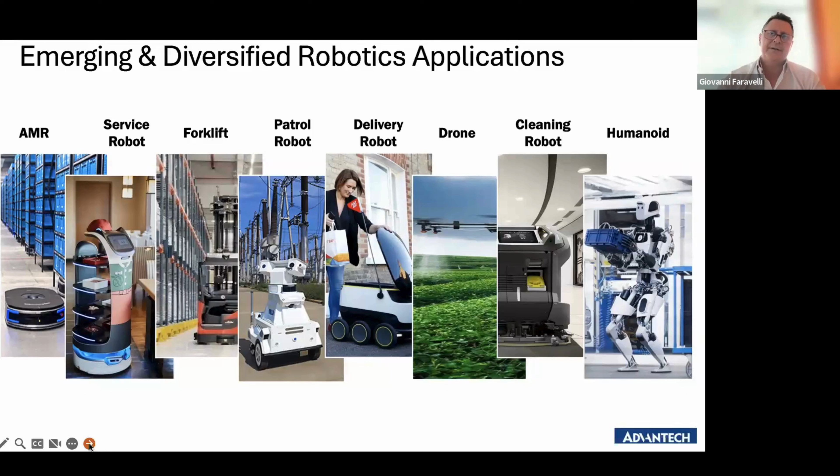I think we can all agree about future massive implementation of robotics in many different industries. In these pictures, you see something already happening, like carrier AMR or autonomous lifter in logistics and manufacturing, service robot in hotels or restaurants, patrol robots for public surveillance or monitoring in harsh environments, delivery robot for public personal services, drones in agriculture, and other applications, and definitely cleaning robots. We see already a strong demand here. And humanoid, also for many kinds of applications to replace humans in intensive and repetitive tasks.

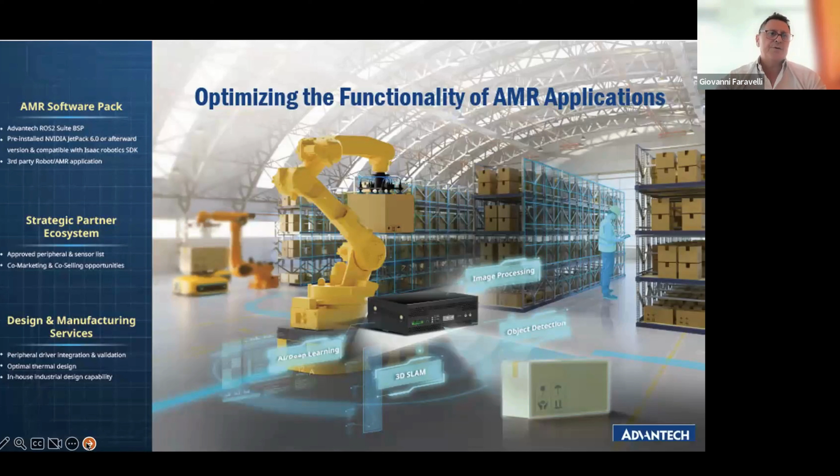In today's webinar, I restrict the focus mainly on one controller for robotics based on NVIDIA technologies, well appreciated by developers since it delivers easy hardware and software integration, rich IOs, and high AI inference performance. So the product name is AMR-S100, based on Jetson AGX Orin.

In general, data acquisition from sensors in order to enable perception and localization are vital for an autonomous mobile robot. For this reason, we have integrated rich IOs like USBs, Ethernet ports, and up to 8 GMSL2 camera support. So we ensure support for LiDARs, radar sensors, useful for mapping and safety reasons, but also serial port, digital input-output, and dual CAN bus for motion control.

Wireless connectivity is also key for mobile robots, where we can integrate Wi-Fi 6 and 7 and 4G, 5G connectivity using our own M.2 add-on modules. Really appreciated by our customers, the integrated IMU sensors, very important to deliver orientation information to ensure reliable and precise robot movement.

Reliability is, of course, a key aspect, and we design and carefully validate our computing solution against high-level shock and vibration, and also wide operating temperature and wide power inputs. This makes the AMR-S100 the ideal controller for robot manufacturers.

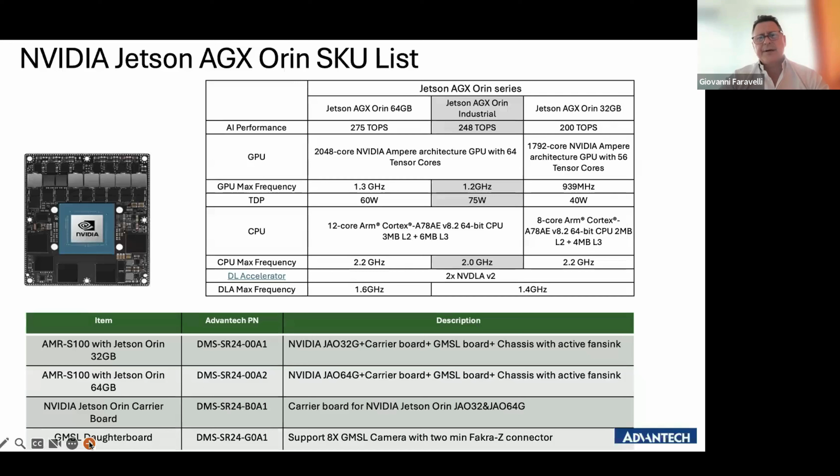AMR-S100 is built around a standard NVIDIA module, and we decided to create standard part numbers using non-industrial SKUs due to lower power consumption and also price positioning. That's important. You can see here the configuration available for standard part numbers and also part numbers for carrier boards and GMSL daughter boards. You will better understand in the next slide.

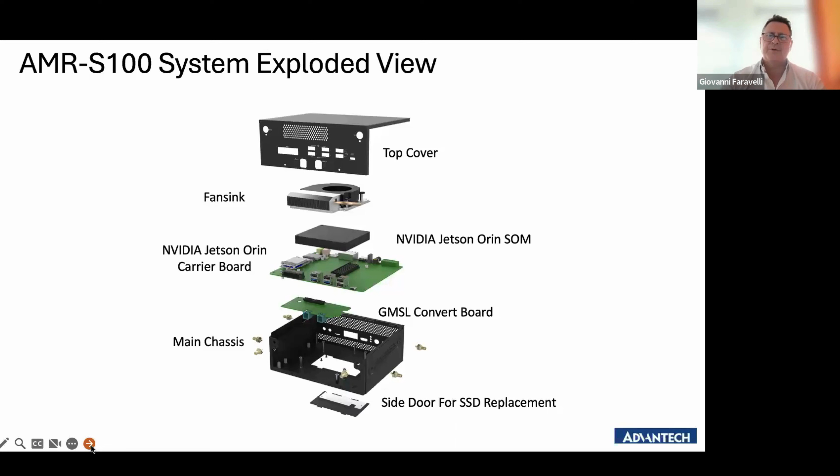We designed it so the AMR-S100 is not only an off-the-shelf solution, but also meets customization demand from customers. This is by project, of course. For this reason, the product is fan-based, and apart from the NVIDIA Orin AGX module, the carrier board, GMSL board, chassis, and antenna position are customizable.

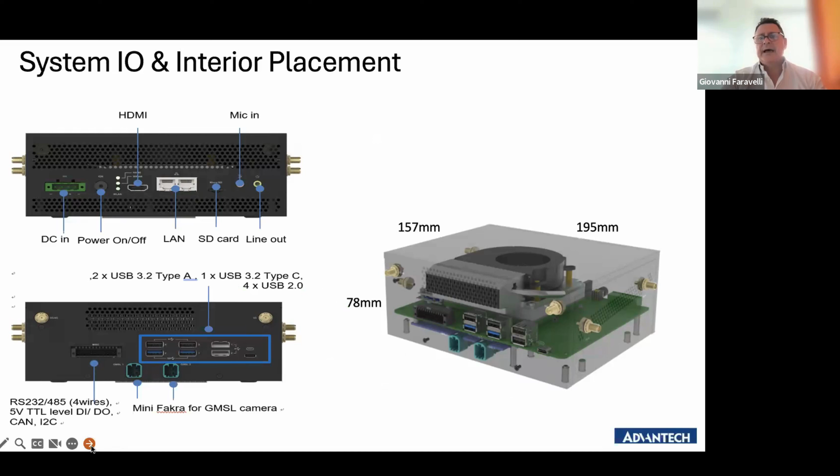In this slide, you can have a better view of the IOs, connector placement, dimension, and internal view of this compute unit.

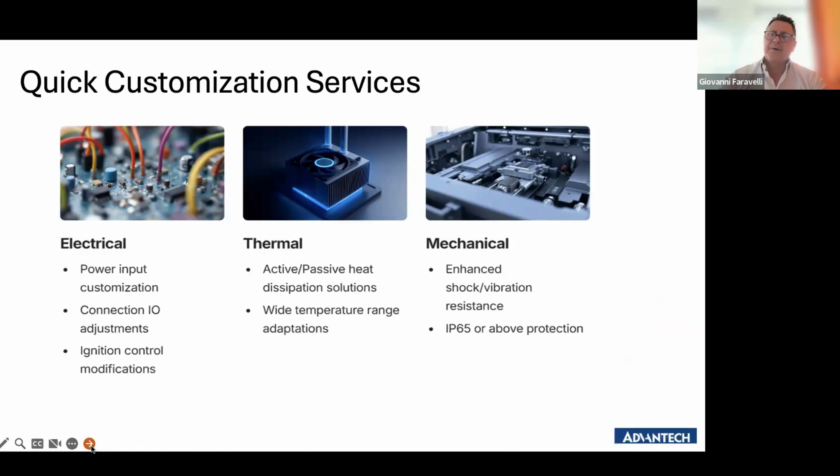As I said, by project, we can provide a number of customization services from an electrical point of view, like power input, connection IO adjustment, and ignition control modification. Thermal design: we can engineer a thermal solution in order to have passive cooling. Mechanical: we can support shock and vibration required by the customer and its specific application, and IP grade as well.

Reliability is a key principle in Advantech design. We take strong consideration of the kind of environment the AMR has to operate in. Our project managers have close cooperation with robot OEM engineers to ensure our compute unit meets environmental challenges.

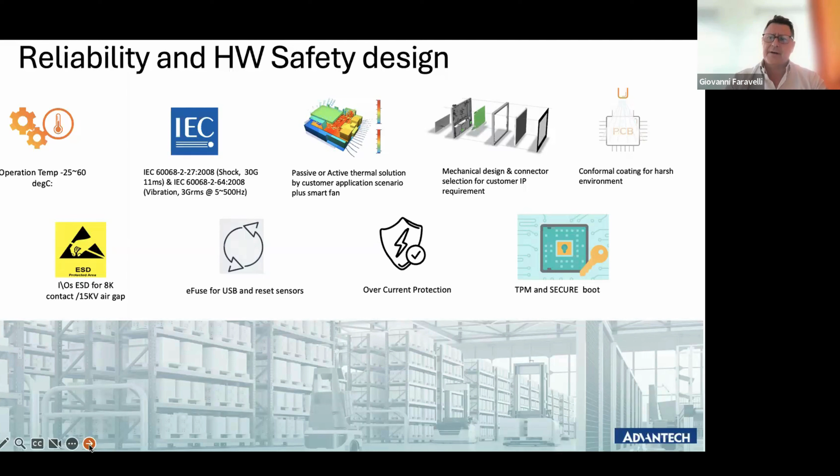As I said, about operating temperature, shock vibration, thermal dissipation, IP grade, and in case optional conformal coating, but also safety measures like IO ESD protection and eFuse USB protection, and the reset function in case USB sensors hang, overcurrent protection, integrated TPM, and also secure boot.

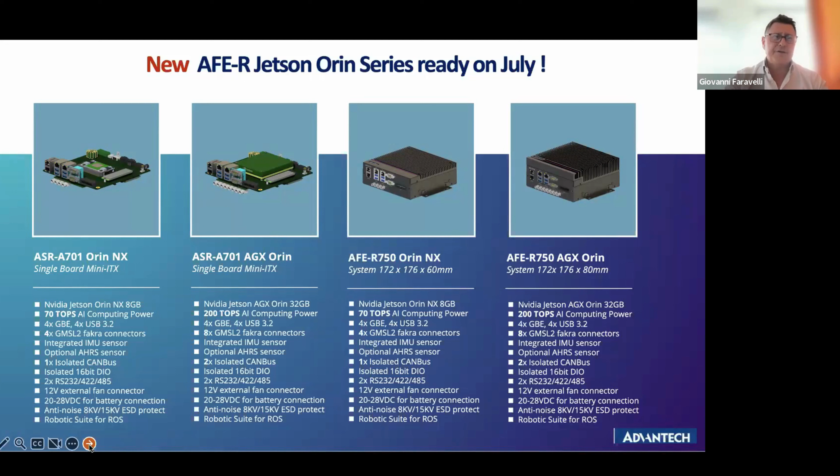So many of our customers, not only in robotics, are using this Advantech software tool with strong satisfaction. Next page, please.

Robotics is a complex and rapidly evolving sector, and no one company has the skill to cover all the technology aspects needed to build an autonomous mobile robot. For this reason, it's key for our company to create an ecosystem of technology partners. I will now hand the floor over to our partners. Next page, please.

Thank you very much, Giovanni, for your presentation. Now we will hear from Karthik from Orbbec. So whenever you're ready, Karthik, over to you.

Yep, I think I'm ready. Thanks, Michelle, for handing it over. So folks, I think I'll have about 10 to 15 minutes. I have 5 slides - the intention here is to get maybe 50 to 60% of the message from the slide to you folks. So I simply recommend you maybe screenshot the slides if you want, and then you can always reach out to us offline, right? So this is sort of the way we're going to do this.

So 5 slides, but there are like 3 sections. I'm going to cover what's going on in the vision world at Orbbec, and then what is it that we have to do with Advantech, because there's no free lunch. So that's the part where I'm going to talk a bit more about the fusion between what we did with Advantech, and then Stefan is going to give you more insights. Next slide, please.

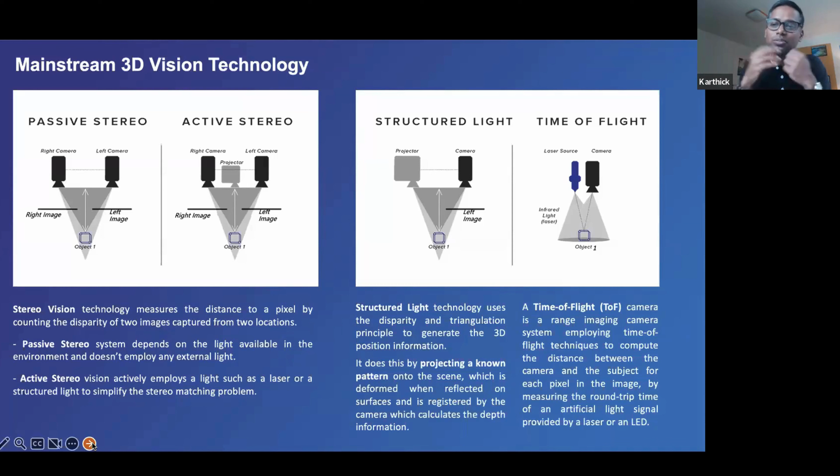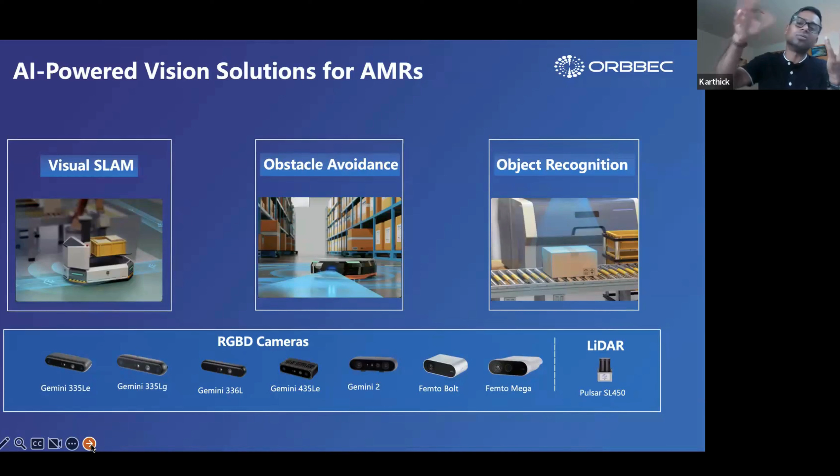There's only so much a LiDAR can do, and LiDARs aren't looking at a bigger field of view. So if you mount a camera at the top, there's a ton of use cases that open up when you have cameras that can do object recognition - that's where your depth and RGB quality all kick in. Because you do object recognition, our cameras can also be used for stationary robots, and the world is merging between mobile and stationary, called mobile manipulators these days. So our cameras can be used for AMRs as well as for a robotic arm mounted on an AMR, for example.

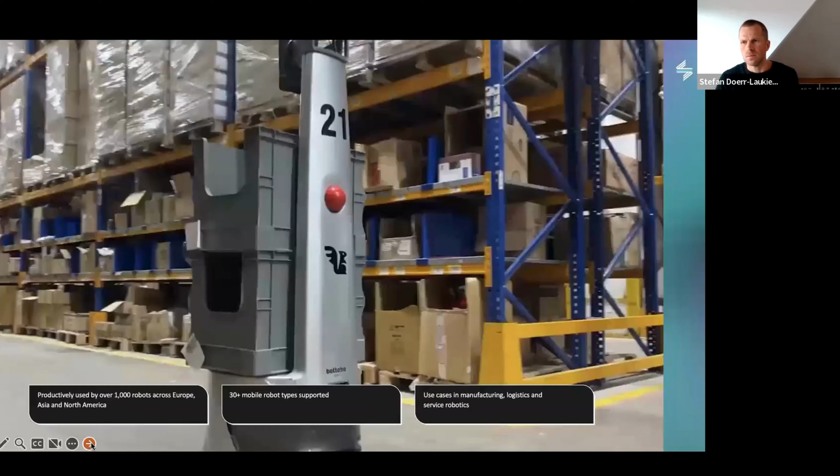So this might have been quite theoretical. Let's look into actual applications of our customers. The number here is more than 1,000 robots already using Node OS in production. Actually, this month we just exceeded 1,500 robots.

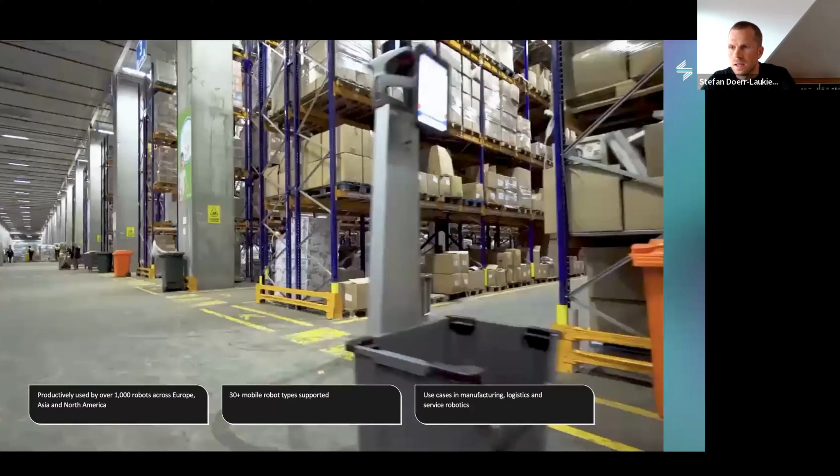Our major or largest end user is BMW, where several hundred robots are running in several plants. We have already enabled more than 30 mobile robot types with Node OS, mostly located in manufacturing or logistics use cases, a few service robotics.

Next slide, please. So far, this Node OS platform, as I described it, is heavily hardware agnostic. You can plug in different sensors, different compute, different hardware. This is how we designed it.

So what's the benefit of now bundling this with certain computes and sensors coming from Orbbec and Advantech? I would say compatibility is one, but having something that's out of the box, plug and play, with proven performance and functionality is the next level when it comes to a fast go-to-market and easy integration. That's a strong advantage with this pre-configured and predefined system.

But there's more. If we combine our software suite with the Advantech controllers and the Orbbec cameras, we have the possibility of more advanced perception functionality, and thereby can apply our solutions to more broad applications and be more flexible on the requirements. That's another one.

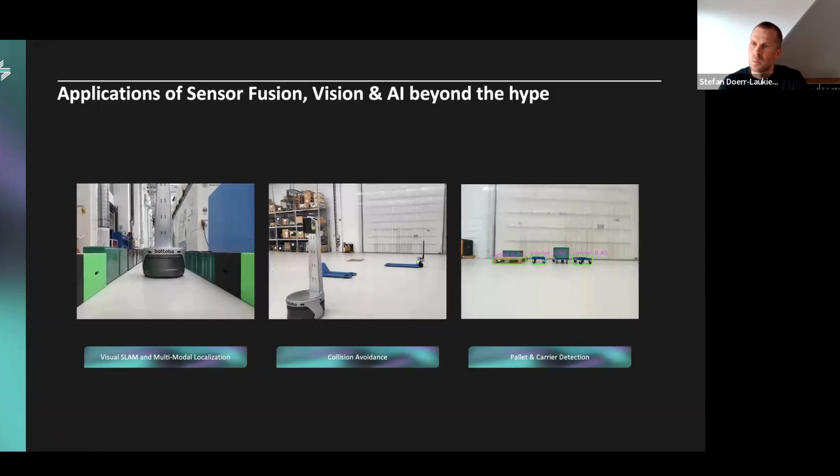And last but not least, AI is certainly a hype, but it's also the most profound technology that's coming. With this bundle, you are future-proof. You know that once the time is right for certain applications to leverage these kinds of solutions, you can do it. And this is my final slide.

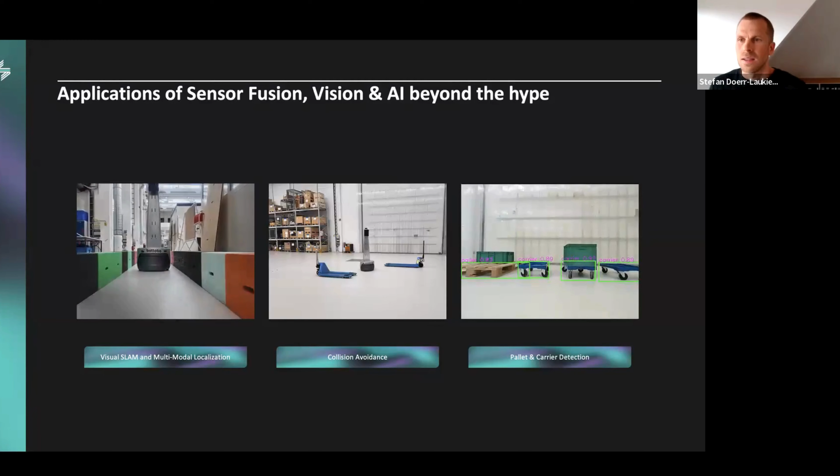Since there's already a lot of talk about using vision for AMRs, using AI for AMRs, and certainly some part of it is more of a hype, the question is, where does it already make sense to use it? I want to show 3 distinct use cases where we already see the value of this happening.

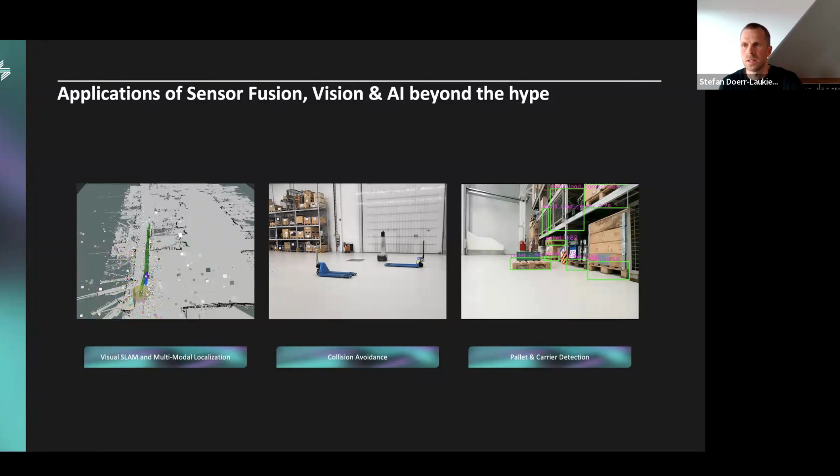The general theme here is LiDAR are the standard sensors for AMRs. They are proven, they have high precision, high reliability, and you can do a lot with them. But they are also limited in that the information depth is somewhat limited, and certain use cases are just hard to realize with them. So the power here is not choosing a single sensor technology, but actually fusing it, combining the best of both worlds, and having a really powerful setup that can cope with all kinds of conditions.

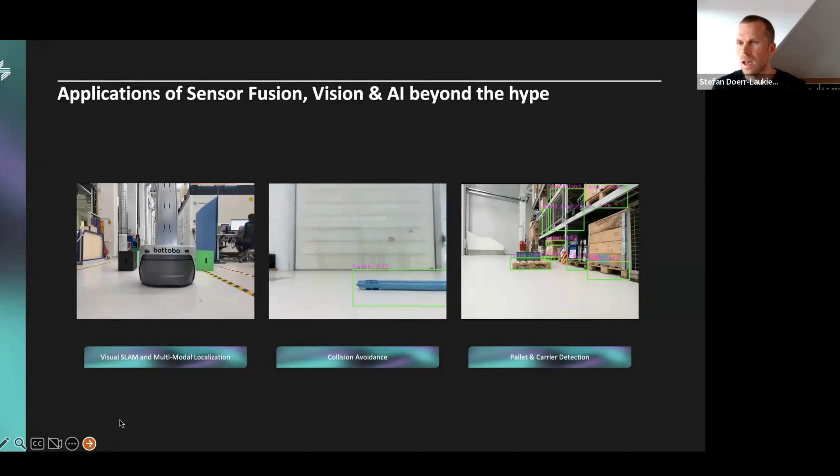More precisely, we see already a lot of benefit in using cameras in fusion for localization, so visual SLAM, typically in areas with low structures, open areas, but also long flat aisles. A camera that's added can just give additional robustness and reliability to cope with these difficult situations. So that's the first use case.

A second one, if you are from the industry, a well-known one: the problem of parked forklifts or just forks in the way of an AMR. The problem is the forks are so low that the LiDAR typically can't see them. Also, a 3D camera will have a hard time distinguishing them from the ground. But using vision and AI, it's quite easy to detect the forks and let the robot easily avoid them before bumping into them. That's my second use case.

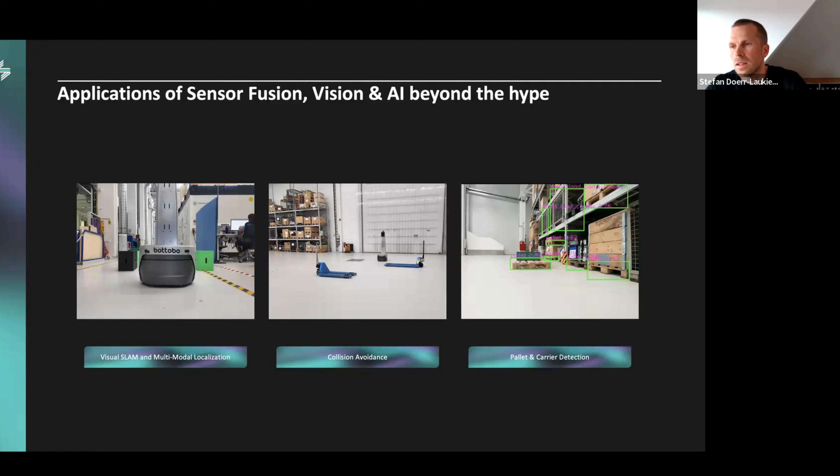And the third one, where we already see a lot of value, is the whole pallet and carrier detection. Of course, with LiDAR you can also detect the pallet, but when it comes to classifying different carriers, or actually looking at the load on top of the pallet to make sure it's rightly packed, a LiDAR comes to its limits. Again, using computer vision and AI, we can quite easily classify different carriers for picking up and interaction, then use that information to pick up the right load, to report an alarm if something is not well packed, and use that as additional information to make our applications more robust, more versatile, more flexible.

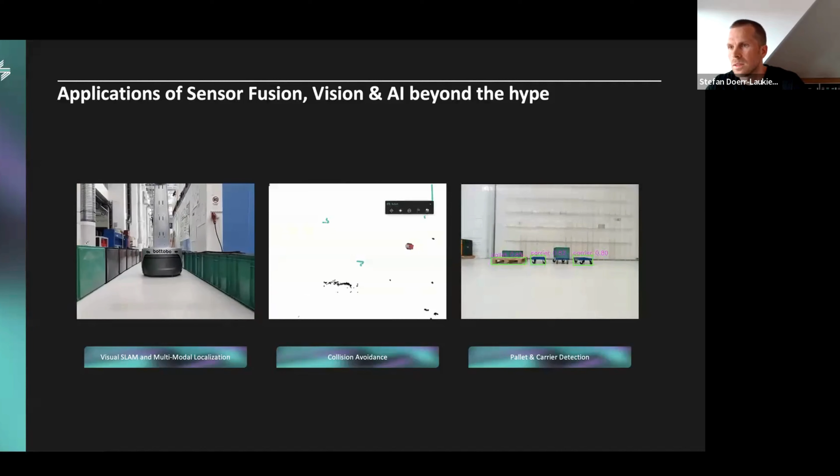Next slide, please. And this is also the end of my presentation. Thank you all for listening.